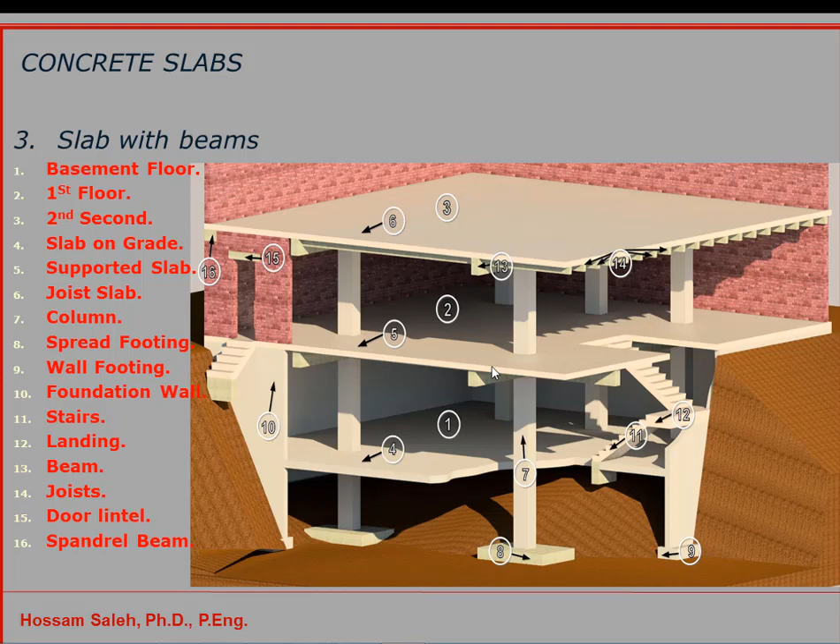Now we have three levels of the beam. The top level or the top fiber, which will be under compression in this case, and the intermediate, not in the middle, I mean intermediate, between the top and the lower face, which will be AB, and that is the location of the neutral axis of the member. It doesn't have any changes.

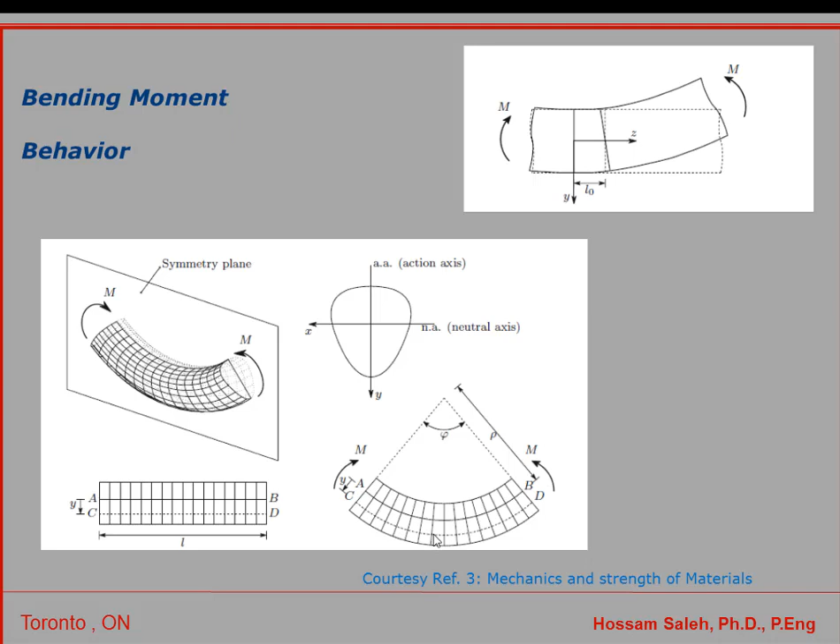And then the other level is at CD, and CD, you can imagine that it has more extension based on this radius. When we are talking about extension, that means it is under tensile force. So I have compression force at the top and tensile force at the lower face of the beam.

Now if I'm designing a beam to resist this bending moment, as we normally do in a steel structure, we design that based on the allowable stresses, sigma equal to the factored moment divided by S, where S is the section modulus. When we know the bending moment and the maximum stresses of the material we choose, normally Fy equals 350, and we multiply that by 0.9 as a factor of safety for the material, then I can get the S for the cross section.

Now when I know my S, my section modulus, I can go to the design tables and choose a member which will fit within my space and satisfies the criteria for my building. So that can be a W section or I section or HSS channel, whatever.

But the question is, can I use the same concept for the design of the concrete beam? The answer is no. Why is that? Because this member now combines steel and concrete. Structural steel has only one material, so I can use the section modulus and design it. But when I have reinforced concrete, I have two materials working together, the steel and concrete.

And we have to assume that the steel and concrete have a full bond. So whatever happens at the same level for the concrete, it will happen to the steel. So the bond is very important to achieve a composite member. Now what will be the cross-section behavior of this combination of the concrete and steel?

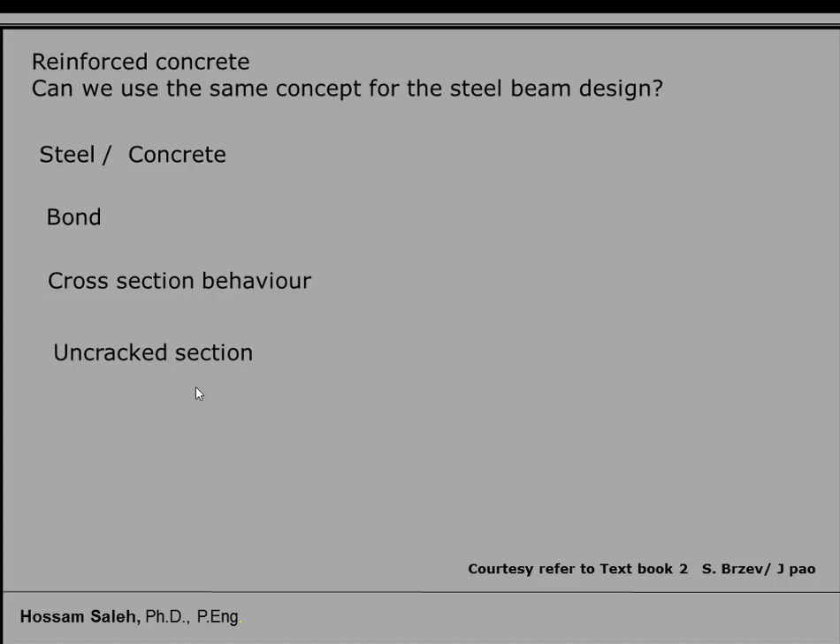The moment the tensile stresses on the section are bigger than the tensile strength of the concrete, the section starts to crack. In this cracked section, the concrete is cracked and it cannot carry any tensile force. So the difference between the two shapes is, in the uncracked section the concrete is acting with the steel to resist the tensile force, because the tensile stresses on the cross section are less than the tensile strength.

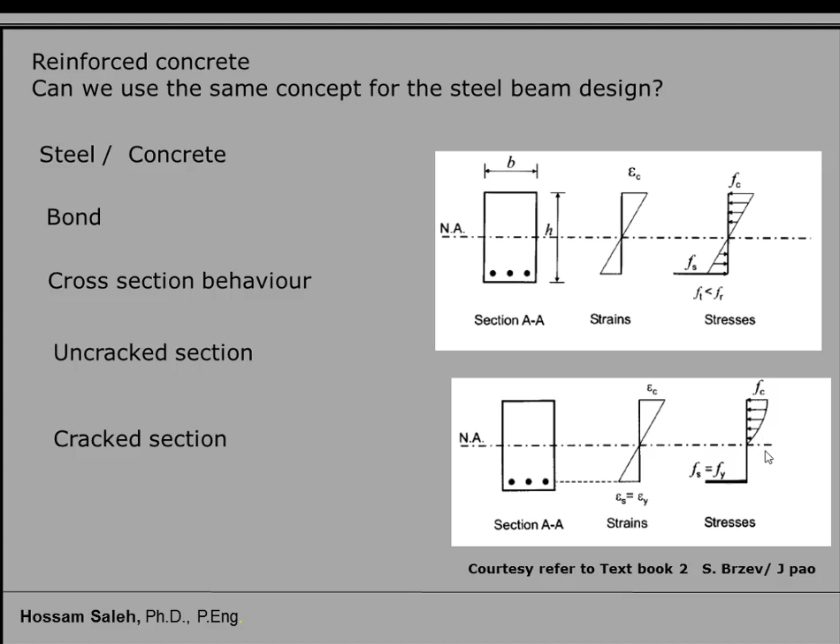If I can calculate the compressive force FC at the top part, and the force in the steel, I can calculate the resistance of the beam for bending, which will be equal to this force times the lever arm, or the distance between the forces. We will go through the details of how to calculate the forces in the concrete and the steel. So I have two materials resisting the bending moment: concrete under compressive stresses at the top, and steel under tensile stresses at the bottom.

Now when we speak about failure, what type of failure can we expect? The concrete can fail when the stresses on the concrete are much bigger than its resistance, or the steel can fail when the tensile stresses are much bigger than the tensile resistance of the steel. Each one has its own description. If we have a concrete failure, the bad side is that it is really brittle, and the concrete explodes when it fails. So with concrete failure we don't have any warning, no cracks, and we cannot repair our building. So we don't want that.

With steel failure, before it happens the steel starts to elongate because it is more ductile, and before reaching fracture of the bars, this elongation will be translated into cracks of the section. So we can see cracks in the beam, and that tells us something has to be checked, and then we can repair the beam.

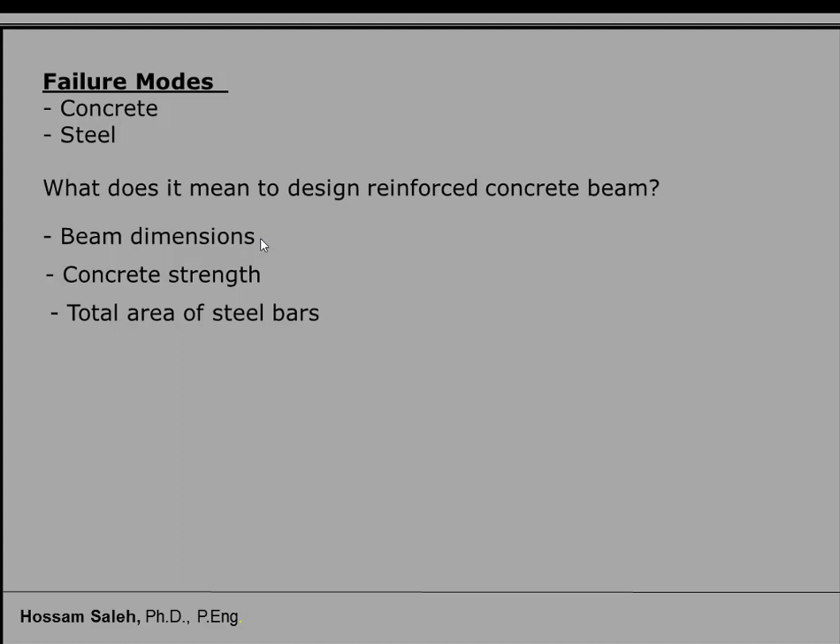And we have to specify the concrete strength, what type of concrete we are going to put in the form of the beam, and we have to put how many bars should we add to this beam dimensions.

Now, to make sure that the concrete and steel are working together, we have a few assumptions. These assumptions are: we have to consider a full bond between the concrete and steel. We have to assume that the cross section remains plane, and we have to ignore the tensile strength of the concrete. What does it mean?

Number 2, the cross section remains plane. That means the strain in this member is equal to the strain in this member, is equal to the strain in this member, because the cross section remains plane. And we ignore the tensile strength of the concrete, so the tensile force will be only resisted by the steel force.

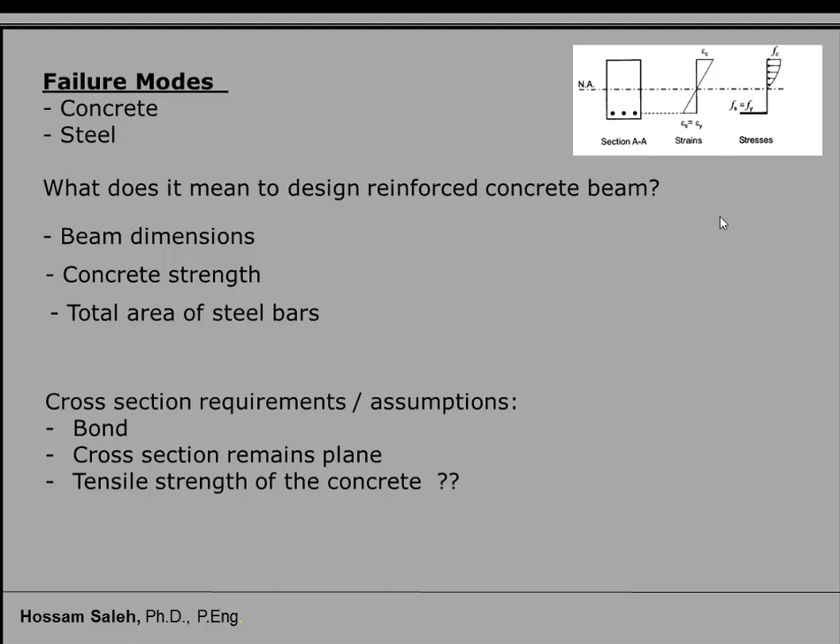But we know that when we pour the concrete in a formwork, we have different conditions on the site. So it's the weather, the compaction, and the vibration. So many items can affect the final strength of the concrete. So we might ask for F prime C equal to 35, but what we get on the site in the formwork might change, might be less than that.

To account for this variance, for the workmanship and the delivery of the concrete, we account for material safety. So the material safety here is phi C, and for the concrete it is 0.65. So we reduce the F prime C, and we use this value in our design as phi C times F prime C, with phi C equal to 0.65.

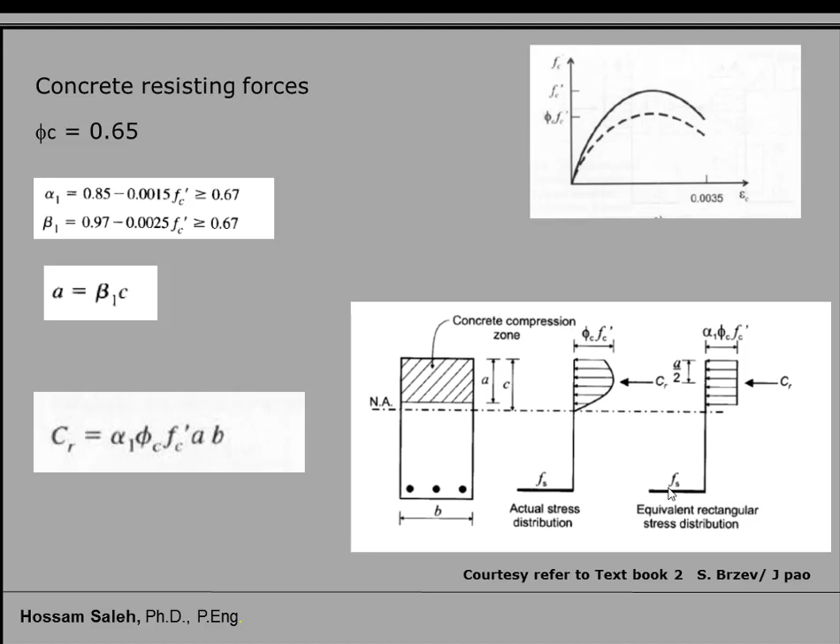Now the second step is to calculate the Fs. To calculate the force in the steel, we have to create a balanced force, which means that the compression in the concrete will equal the tension force in the steel. So to calculate the Fs, I have to use the tensile force equal to phi s times Fy, which is the yield strength of the steel, times the area of steel. Now phi s is the material factor which considers the variance of the strength of the steel during the manufacturing process. Because the steel is very accurate in production, phi s equals 0.85.

And if you remember, for structural steel, where we have a W section or HSS, we have 0.9. So I have 0.9 for structural steel, and 0.85 for reinforcing bars, and I have Fy. In steel bars, we use Fy most of the time 400 Newton per millimeter square. In structural steel, we use 350 or 300. It depends on your material and what you choose. Now I can have the TR, which is here, and I can have CR.

Now if I know CR and I know T, they are in balance, and I know their values from these two equations. If I know the distance between them, then I can calculate the resisting moment, which will be this force times this distance, or, about the neutral axis, this force times this distance plus the TR times this distance. So to make it easy, we use one force times this distance. The moment in this case will be TR times d minus a over 2, because the center of the compressive force will be at half of the stress block depth, which is a.